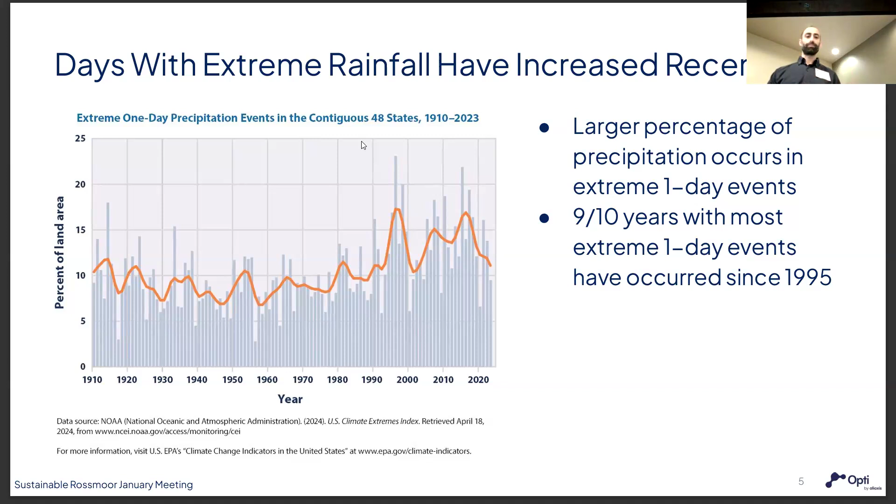There's also a long-term trend, a report card put up by the American Society of Civil Engineers that essentially states that stormwater infrastructure in our country is not keeping up with demand. I understand how that sounds, I work in stormwater, it might sound like I'm complaining, but I think there are some really interesting reasons for this, and it's worth understanding them because we're all trying to solve these problems.

First of all, there have not been dedicated funding sources set aside for stormwater management, which means that whenever somebody at a community or watershed scale wants to improve their stormwater management, they're competing with other projects and initiatives within that community, which can slow down and make the long-term investment strategy more opaque. There's also complicated governance.

We call them transboundary issues in the industry, but really that means watersheds do not care where your town lines are. There are two countries in the world that have gotten this right, I'll give you the answer: the Netherlands and New Zealand both have the same jurisdictions as they have watersheds. The name for mayor in Dutch translates the same as watermaster. So you can understand how they've been thinking about this problem differently for a long time.

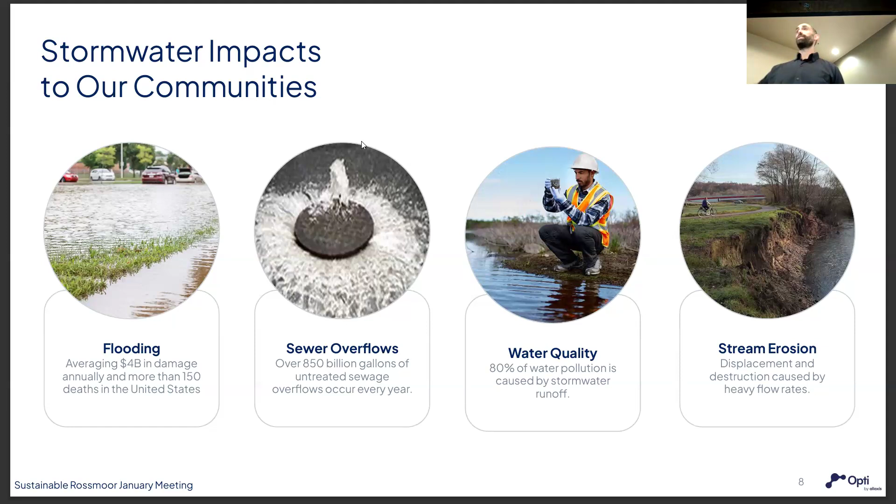That kind of issue not only affects the people who live around the places where the streams erode, but also downstream, where the sediments collect and reduce the ability to protect those communities from flooding. So there's a network of different effects that happen when stormwater is not managed.

So what is this traditional stormwater infrastructure that I seem so bent on improving? This is a very simple diagram, so apologies to the engineers in the room, but it's important to think about it in the abstract to get the point across. I think of them like bathtubs. They have a single size and a single size drain, and how fast that water leaves is a function of how high the water is inside, how big that drain is, and whether there's anything downstream already backing it up.

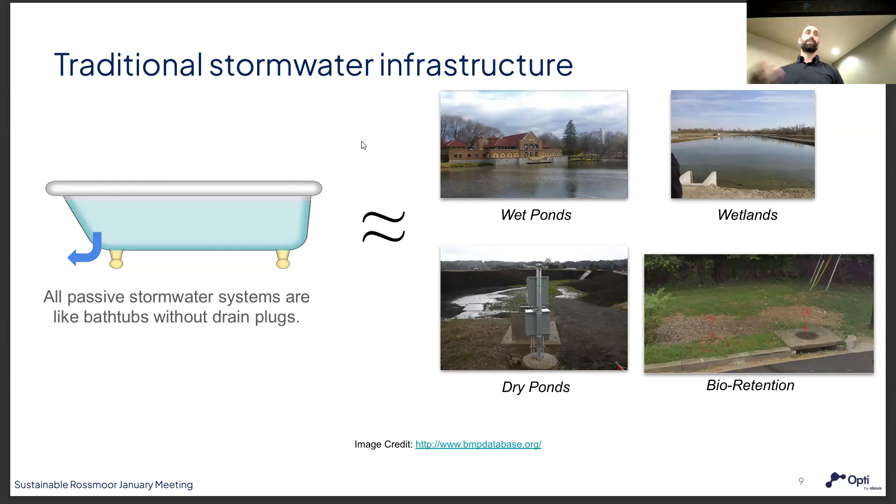They look like many different things. You can call them wet ponds or dry ponds, depending on whether they hold water during dry weather. They can be wetlands, they can be green infrastructure like bioretention basins. They can also be other things like cisterns or subsurface detention structures, like those put underneath parking lots or stadiums. All of these systems are designed to convey a certain amount of water for one of the objectives that matter to the community. And they're designed once.

What are they designed for? I've been kind of hinting at a few problems, but when stormwater engineers think about what they want to do with their parcel, they tend to have one of these goals in mind as far as how they're going to change how water moves through the landscape.

They know that if they slow water down, they can improve water quality by letting the particles settle to the bottom before they're discharged. They know that if they've got a big community that has combined sewer overflow or a flooding problem, maybe if they shift the timing of when all the peaks of water occur at the same place, they can get more effective capacity out of that system.

Obviously, if you have a lake in the middle of your golf course, you need it to look good so that people want to play golf there. Or if it's a wetland, it needs to be within a certain operating regime for whatever plants and animals live there.

Erosion is a lot like water quality protection. Essentially, the faster the water moves, the more soil it picks up. And the more soil it picks up, the more you're eroding. So you want to slow water down.

Flooding is the classic one. It's a very simple equation: get the water away from here as fast as possible.

And some places in the world, not so much in our country, but it's happening more and more—places like Jordan, for example, have led the way at designing for long-term water reuse. They want to actually collect the rainwater and use it for some purpose.

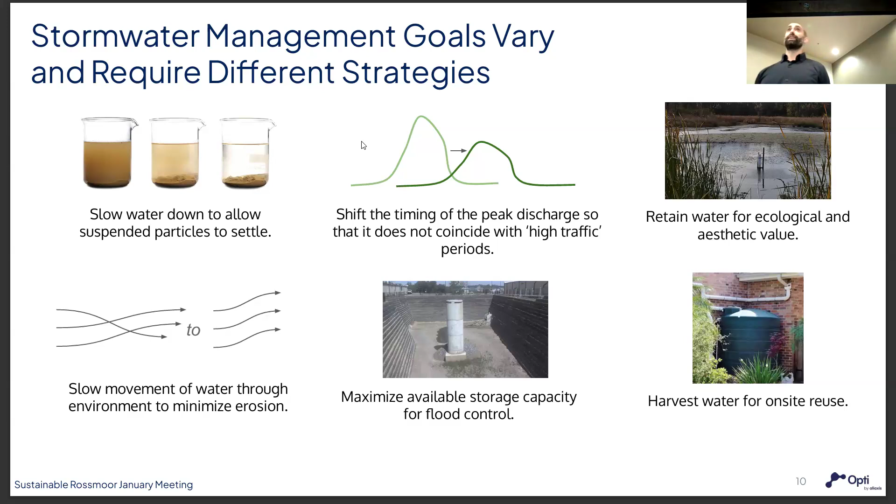One thing that's important to note here is that these are not necessarily compatible goals. If you can only design a bathtub with one size drain, you're only going to get an optimal outcome or solution for one of these objectives. If you need to get water away for flooding, you're not going to keep it slow for erosion control. It's just a difficult problem to solve.

There are site constraints. We've talked about how land is sometimes limited to be available for use. Sometimes there's an inability to infiltrate because of sediment in the soil, and other reasons why maybe the traditional approach doesn't necessarily fit.

One of the big pieces when we started this research that we heard from engineers in the space was that they didn't know how well their solutions actually did. These passive systems are not monitored on a storm-by-storm basis or even seasonally. And so that both means that communities don't know what their return on investment is for this infrastructure, unless they get calls from constituents saying the water's in my basement—then they know it wasn't working. But engineers don't have a way of getting that self-actualization of working on something they know works well.

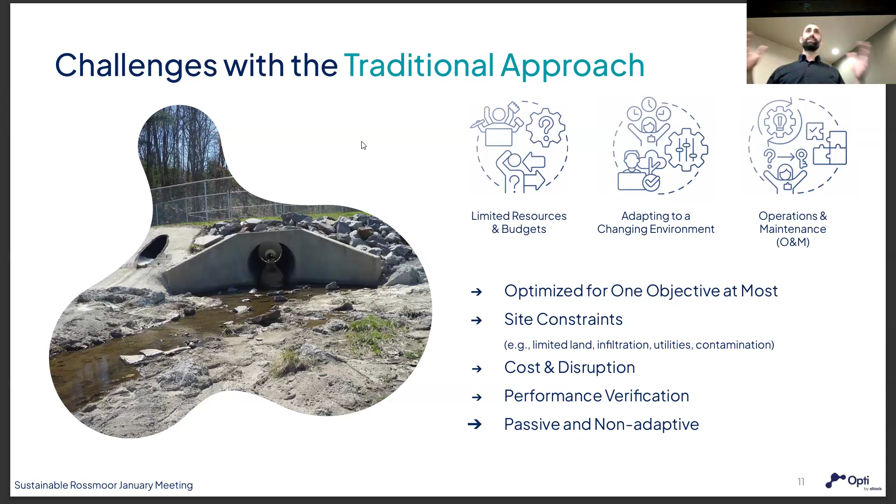So this is a problem that's almost expectable, not something that's that surprising. I'll also note that without the information coming out of these systems, you're probably going to either overspend on maintenance because you have to maintain them all the time to make sure they work, or underspend because you don't have the money and there's no reason to think it needs to be done. So that also affects the overall performance of the traditional approach.

So we looked at all of these things back in 2010, and we were inside one of the preeminent consulting firms in the country, Geosyntec Consultants, thinking about how we were going to build the next stormwater infrastructure for our clients. And it was frustrating. We realized the intuition that we had, that we've now tried to apply here, is that timing, flow rate, and predictability is the opportunity, is the way forward.

You can imagine traffic with rush hour. How many of you drive on the freeway when you know it's going to be rush hour? I certainly always avoid it, because if you can predict the flow of traffic, you can have a smoother commute.

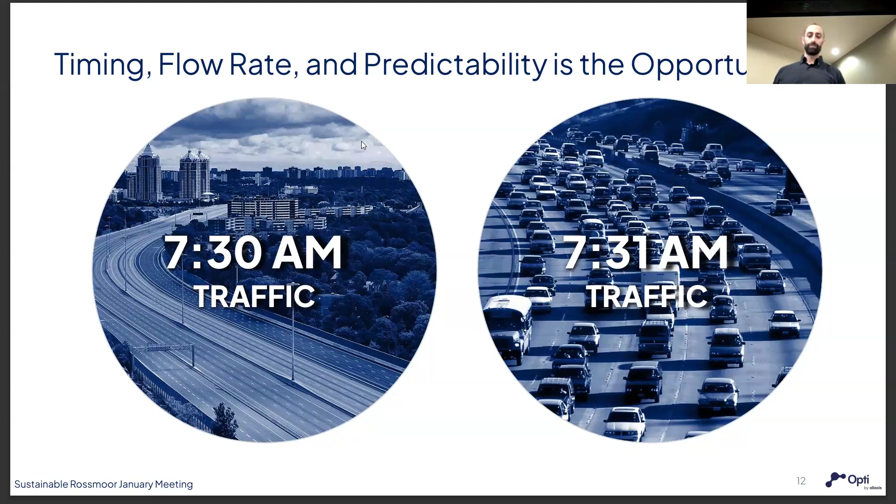What we came up with is a stack of technology that we called continuous monitoring and adaptive control, or CMAC. And what this does is it turns one of these passive structures into an actively controlled, or adaptively controlled, system.

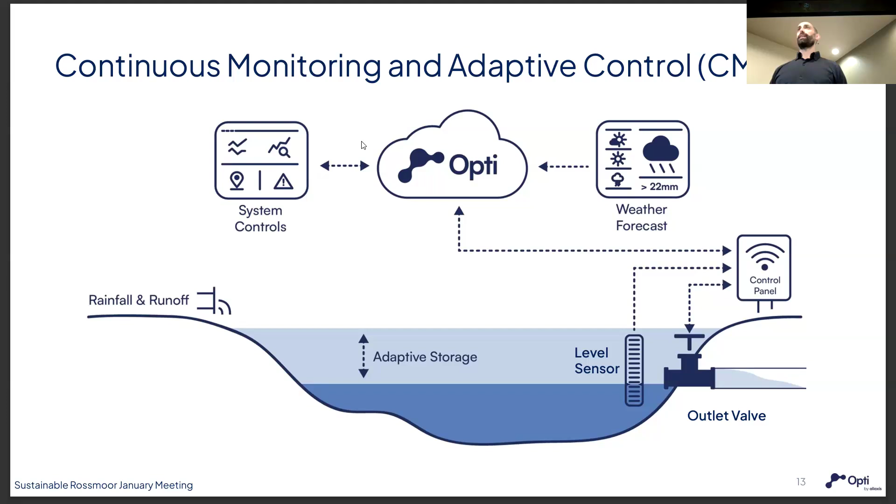So very briefly, we add a valve or pump which can control when water stays and when it leaves. We add a level sensor to the storage, which tells us how much water we've got there. And we connect that through a control panel to a cloud-running piece of software, which can take into account how other systems around the watershed are working, as well as the weather forecast, giving it the ability to understand what the weather will be in the future, both whether it will rain and whether it's going to be dry, and provides visibility into how all of this is playing out to engineers, consultants, and other community stakeholders so that they can understand what's happening and how well their system is performing.

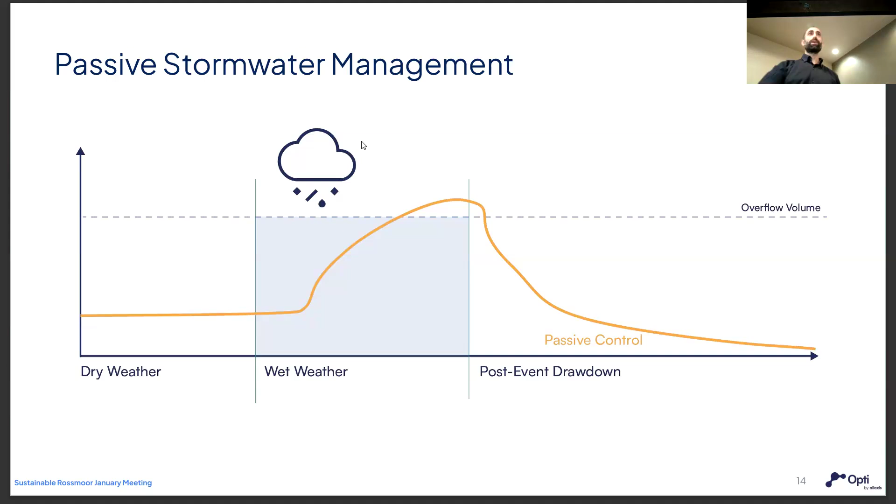With that combination, we're able to turn this passive strategy -- and if you think of this graph as showing how much water is in one of these ponds or cisterns or detention basins over time as it goes through a stormwater or rainfall event, you can imagine that in dry weather there's a certain amount of water, and when it starts raining, it starts collecting runoff, and it starts releasing that runoff while it's collecting it. Once it gets to dry weather again, you're going to continue to see the water drain out at whatever rate, whatever natural curve you would have based on the height of that water and the size of the orifice.

With CMAC, what we're able to do is change this. We can see a storm coming. If we know the storm is going to be bigger than the amount of volume you have to put water in there, we can reduce that volume predictively, letting it out ahead of time. During wet weather, we can either completely hold water back or let it out at a lower rate so that we don't actually go over the top of the system. And then after it stops raining, in the post-event period, we're able to say we know it's going to be dry, so we know it's safe to hold this water back.

In that process, we can allow natural occurrences to occur -- settling, nutrient uptake from vegetation -- which then, when we eventually get to the post-event drawdown period, which happens at a managed and predictable rate, we're actually discharging something cleaner. That's essentially the intuition, and the way -- there are more complicated examples of it, but that's the basis of what we're applying here.

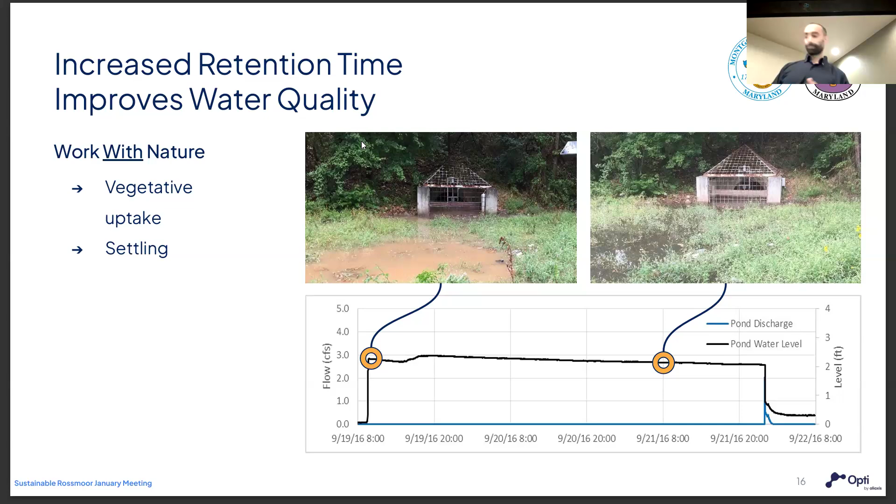Your system is holding the water back. Exactly. So we control the valve, and we just tell the valve when to open and when to close, based on all these sensor information and the weather forecast, essentially. And what you can get with that is you can actually get multiple benefits out of the same piece of infrastructure, because you can have different strategies for different sized events.

So with one system, instead of optimizing it for one, we can create storage just in time to protect for flooding. We can affect the timing of when different parts of the community drain so that there is no downstream choke point that causes that combined sewer overflow. We can increase residence time, as I mentioned, in order to improve water quality.

By the way, that's not an idea that we came up with. If you've ever been to a wastewater treatment plant, the first thing they do is they hold water in these big tanks and they keep it as still as possible. It's called primary treatment. So we're just doing it in the upstream area.

Same exact idea. We can tell the community that's responsible for these assets whether they're working the way they used to. So if they need to do operations and maintenance to clean it out or what have you, that's possible. And we can choose, instead of releasing it at the end of the storm, we can just keep it held forever, so that if you want to irrigate your crops or your garden or your golf course, you can do that.

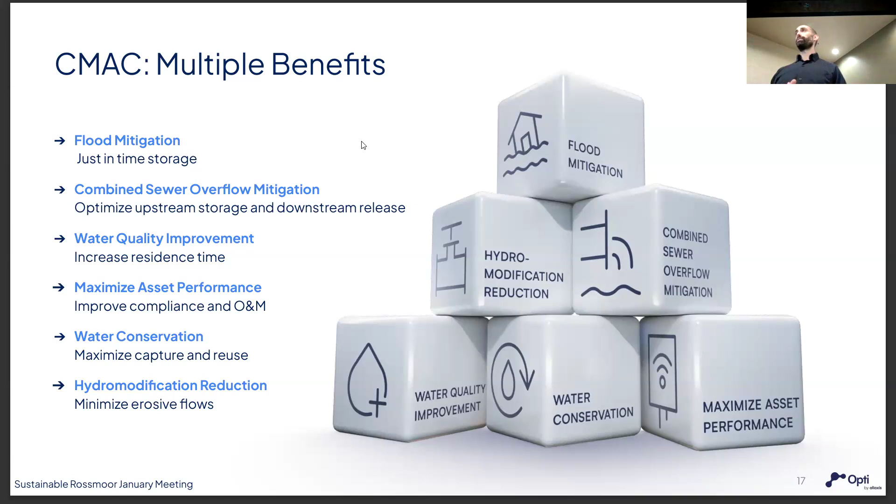And by the way, if you're controlling the timing of flows and you're able to control how fast water leaves, you can choose to make it as slow as possible every time, which ultimately serves the purpose of minimizing erosion.

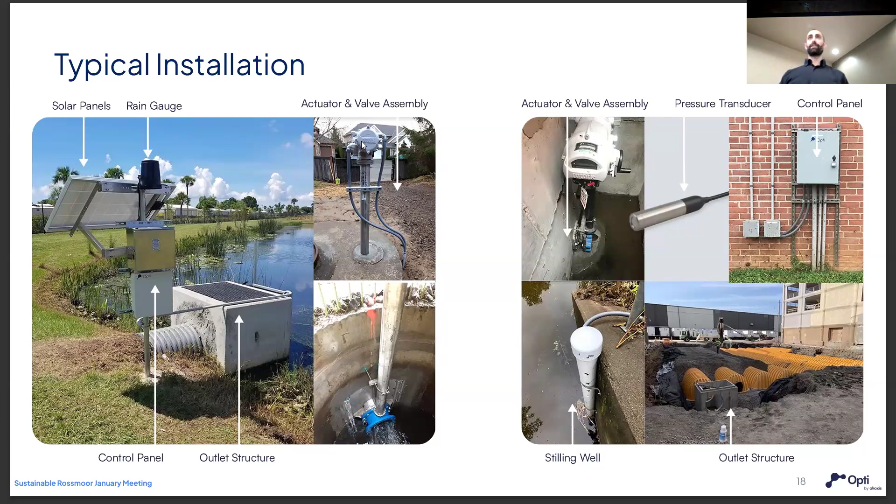Getting this right is important because we're trying to solve some important problems for communities. Ideas are cheap, but execution is hard. It's something I think we all probably know. And that's essentially why this has to be a company. I was very interested in the research in this a long time ago, but the opportunity to do it means you need to work with professional engineers and you need to have reasons why communities believe that it's going to work and that it will be supported long term. And so that's essentially why OptiRTC exists.

And some of the pieces that go along with that, I won't read all of these. I think alarms are important because they can alert people to conditions that matter in this infrastructure, rather than having a completely automated solution that nobody ever sees.

We can know if something's going south, so the O&M teams can get alerted to be available to help. On the mechanical side, a really important detail for safety is that we work with local civil engineers who are designing these infrastructures to know what a safe fail-safe position should be. A fail-safe position is typically either open or closed, depending on the type of infrastructure and its location in the watershed. But if something goes wrong with the mechanical stuff and computers we've added, we want it to be predictable. That's the most important thing, and it needs to be consistent with the expectations of whatever engineer signed off on it.

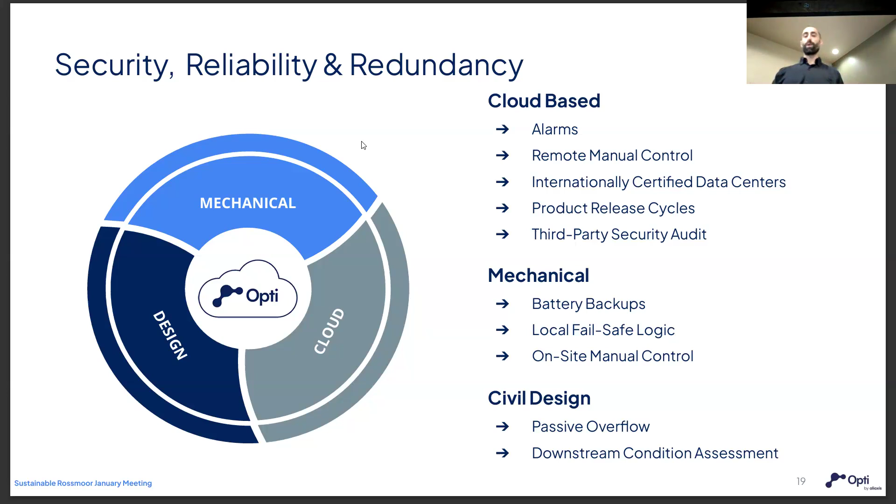We also assist local community partners with downstream condition assessment, so when they're designing and installing these systems, they're doing so with awareness of how it's going to work in the end, and it can be professionally responsible. That's an important part of our formula for community resilience: combining local expertise with technology deployed across many types of stormwater systems to improve how resilient communities are to extreme events.

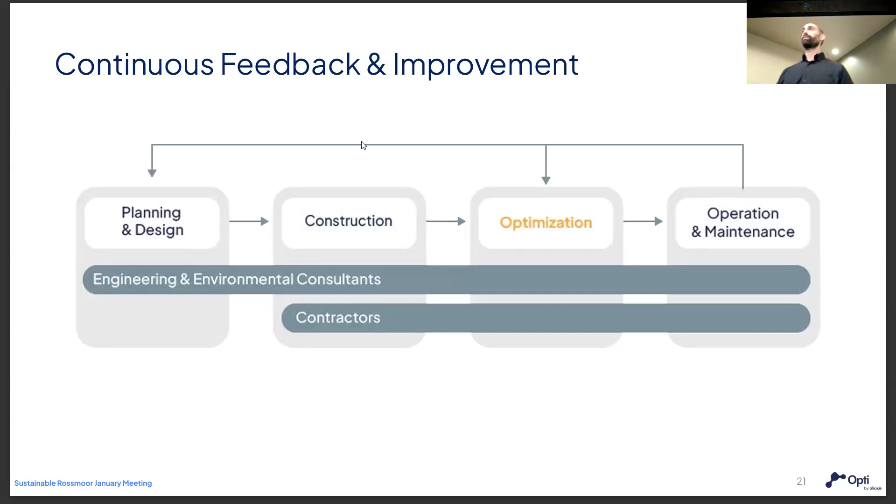Sometimes things don't work the way engineers planned—actually, a lot of times things don't work that way. It's important for community investment to be properly calibrated to the biggest problems they face. This visibility from improving how each individual parcel works can inform long-term planning efforts so watersheds can be made more effective over time, without wasting time as we get better at the solution.

I'm not going to belabor this, but our customers win a lot of awards for this, because they're taking a step forward toward designing for an uncertain future, not just solving the problems of the day. And because they have information that proves it, which always helps with people looking to provide recommendations.

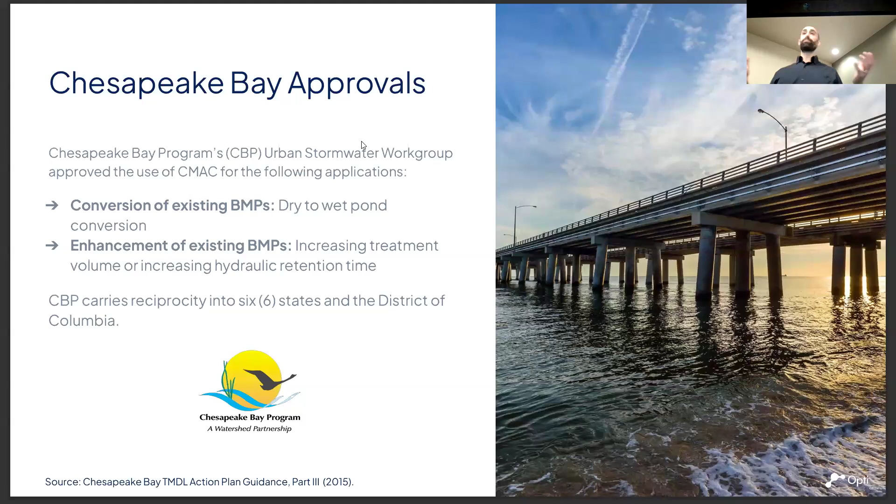I'll go briefly through this piece too, because I want to get to the case studies. In the stormwater design space, regulatory approval is an important component of being considered an adoptable solution. We've worked hard with a number of leading communities in stormwater management to establish ourselves as a trustworthy and viable solution. In Chesapeake Bay, we've been approved for dry to wet pond conversions, as well as increasing volume for flood protection and retention time for water quality.

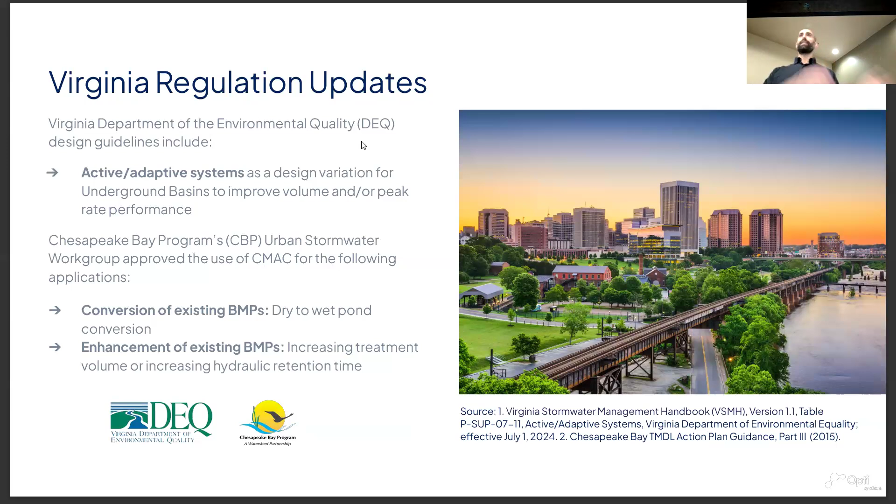In Washington State, where erosion is a major concern and it rains almost all the time, we've been working with them for a number of years, and Lainey will give you a deeper dive on that in a moment, to help optimize how fisheries they really care about are protected from increasing urbanization. In Maryland, I mentioned earlier, it's about water quality permitting and approaches. And Virginia has also sanctioned our solution as suitable for taking facilities that once were only static and handling dry weather, and now can be used to hold water back for various alternative objectives. Thank you for your attention.

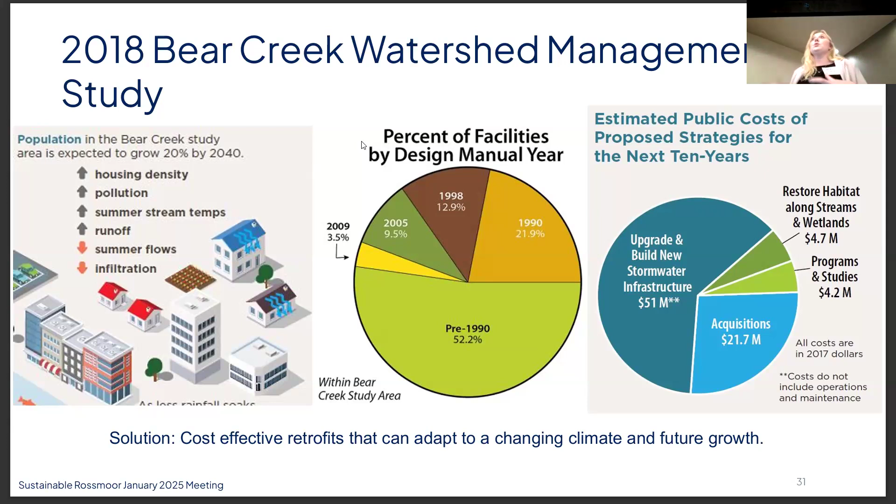What they looked at here was just traditional detention ponds and stormwater ponds that are passive, and that's what costs this much money. So King County and Redmond were both really looking at how they could retrofit some of their existing systems, or do something else besides build a bunch of new stuff for $50 million, to also get the same benefits.

So they looked at a bunch of different things they could possibly do. One thing they looked into was building new infrastructure—new ponds. The problem is that takes up space and land, and land is not only hard to come by, especially in an area like this—it's quite built out, lots of homes, a very residential area. There's not a lot of space, and the land costs a lot of money.

It's expensive—probably the most expensive thing in that $50 million this community was looking at purchasing for these new projects. So they were thinking maybe let's not do that.

They looked into LID, or low impact development—you can also hear GSI. These are more about slowing and infiltrating water into the ground. The problem here in this area particularly is that the soils just don't want to let water through—they're just not having it.

A lot of areas in California are like this too—they have really thick clay soils that just don't want water to go through. So they looked into whether they could do deep well infiltration—could they dig through all that clay and try to get it somewhere else? The answer again was no; there's kind of no glacial outwash happening.

There wasn't really a deep groundwater basin that you could infiltrate to, like there is in other places like the Central Valley or areas where you can really store more water underground. So that was also a no.

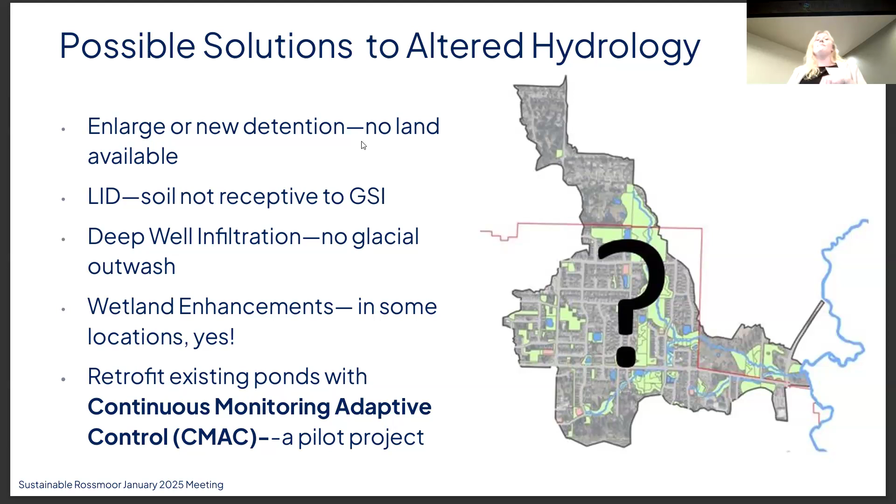They are also looking at some wetland enhancements, which are really good for water quality treatment and slowing down the water. They have some of those, and in some locations those are awesome, but that's not going to solve all of their problems. So the other thing they were looking into is how can we retrofit existing ponds with CMAC. That's what we worked on with them, and we did a pilot project that we're hoping to keep expanding.

So why did they end up choosing CMAC? Why did they decide to work on this project with us? Like I mentioned, it limits the land disturbance significantly. In the figure, the blue pond areas are their existing ponds, and the red over it shows how much they would have to build and how much space they would have to take in order to get the benefits they need. You can see some of that is going into nearby houses and over roads.

There's just not enough space for what they would need to do with traditional passive infrastructure. Another reason was that traditional passive infrastructure is about $1 million per pond - that's no small amount of money. But with CMAC implementing the hardware and software we provide in this system, it's more along the lines of $165,000 for the capital costs. So just avoiding spending those millions for each pond can be really helpful to get the same benefits.

Another thing they were super interested in, which is really working out well, is collecting the data and being able to use that data to make decisions on the system. So they have a lot of things they're looking into in this area.

They're really concerned about the salmon, the trout, and the biology going on in the river, which has to do with temperatures, the amount of water, the quality of water, and all those things. They're doing studies right now to figure out how the systems we're putting in place are working, because a lot of these things that engineers design and build, we're not quite sure if they're working like we wanted them to.

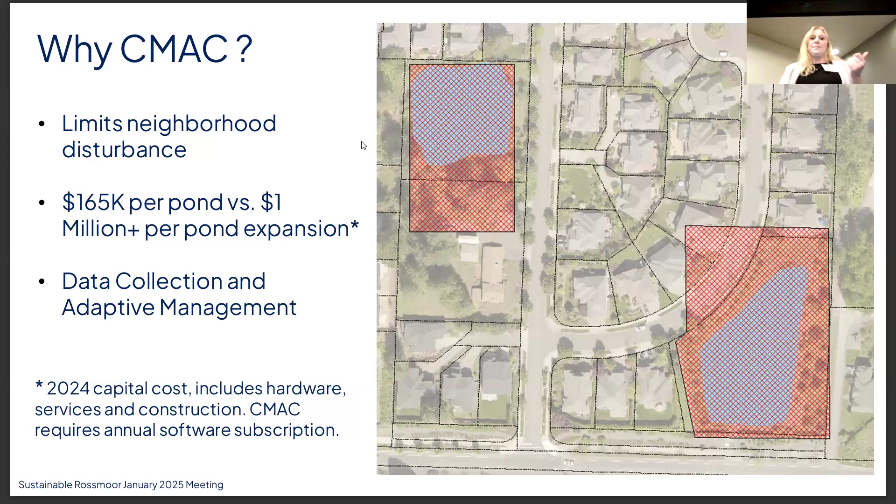Speaking as a civil engineer who tried to design these systems for a long time, I was never really sure that what was put in was exactly what we wanted it to do. In this case, they're able to see the data and use it in other studies to say, hey, we're not really seeing the water quality benefits we wanted - what else can we do to help? So that's why they decided to go with us.

I'll show you how it worked. The partnership was really important here between the city of Redmond and the county, because they both own land within the watershed to the tributaries that go to the river of concern. We worked together with them to do some feasibility studies on how the CMAC could work and what benefits it could give them.

Like I said, they want to monitor these things for other reasons. They're doing a study right now to see the trends in the overall watershed, and this is going to be a really important study to show how these systems can work and help inform what they're going to do in the rest of the watershed.

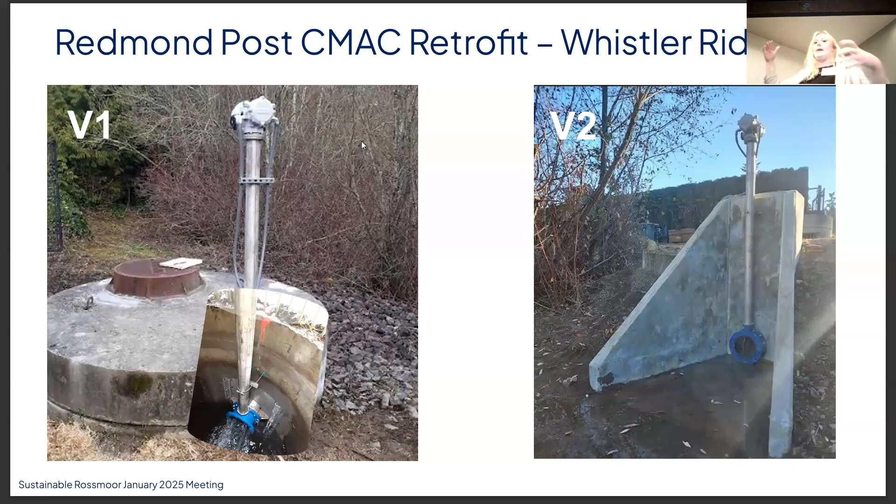So I'll show you some pictures of what they look like. This is one of them - you can see the blue valve at the bottom, and it goes up the stem to the actuator, and that's how it opens and closes. That's just at the outlet point where that wing wall is. Here they tried to put it both in a manhole and outside, and that one ended up working better in that case. This one is called Crown Heights.

It's kind of in a more open suburban area. They had a bit of space. They have a solar panel, and they let that area behind in the picture fill up with water when it's raining. This is a rare sunny day we caught in Seattle.

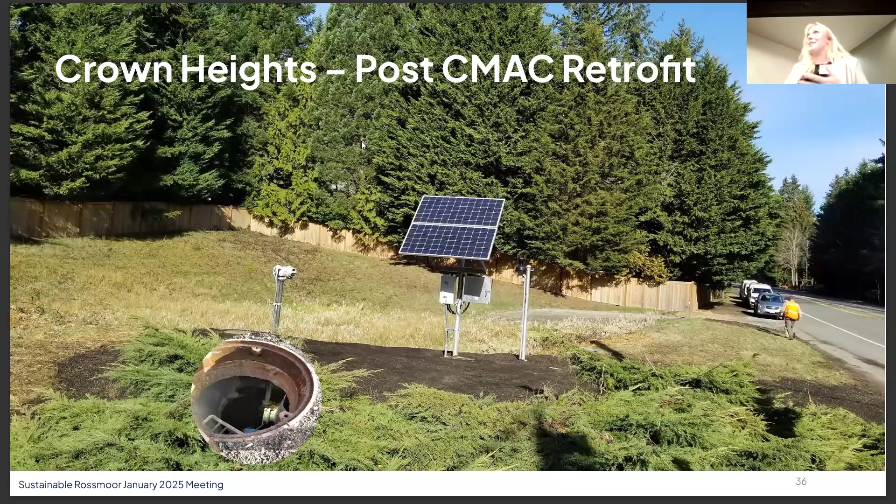This is another example of one of the ponds, which is right nearby, but it's within a more densely urban area, so there's housing right next to it. Those are houses that we maybe would have had to knock down for a new pond, but we didn't have to because of CMAC.

So how is this working? We built it a couple years ago, and it's been working for a while now, so we've looked at the results to see how it's going. These figures show the King County ponds, the ones on top that were previously dry ponds, so they don't usually keep water when it's not raining. The ones below are in Redmond, which are usually wet ponds that keep a little bit of a dead pool, if you've heard that term for reservoirs.

This is about 60 events that were measured, showing peak flows on the y-axis. The blue shows the passive peak flow, which is modeled for what would have gone through without the retrofit. The orange to the right is the measured peak flow actually in the system. You can tell it's much lower, which is good—we want lower peak flows to help with erosion, flooding, and related issues. Especially on the dry ponds, we saw a huge decrease because usually they wouldn't have extra space to fill up before a storm, and now we're able to do that.

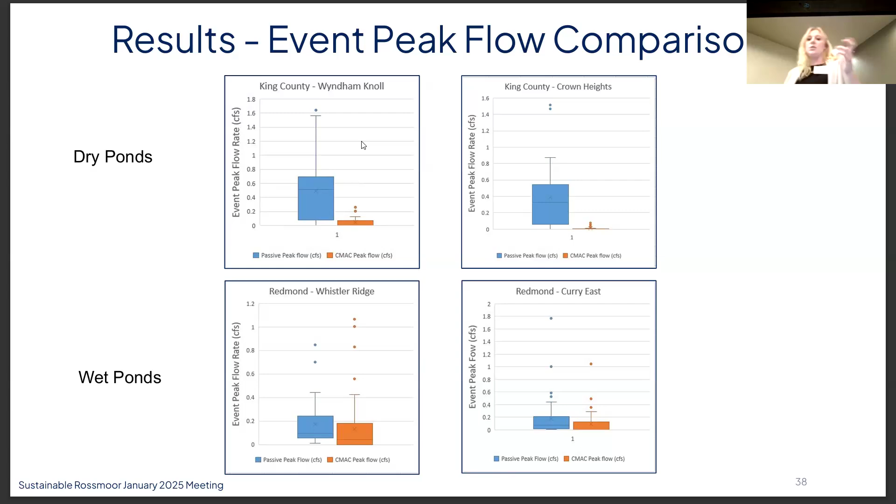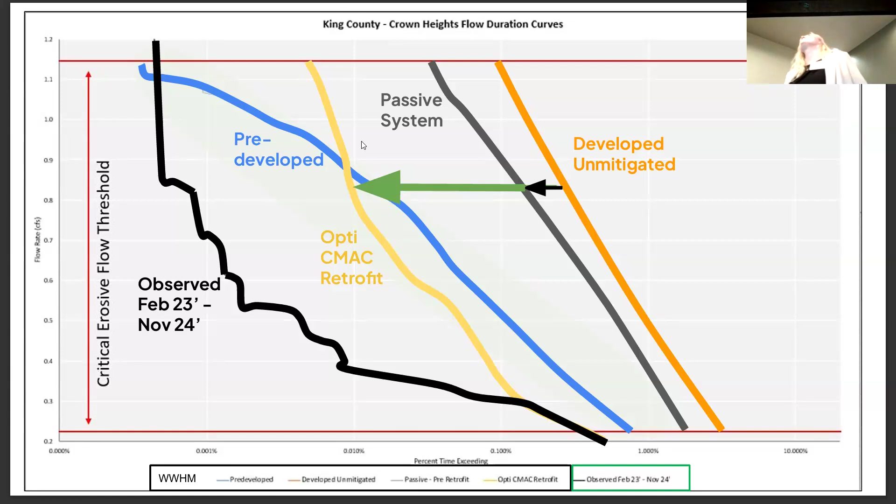So do we know that it's going to have less flow under those conditions? That's not always the case. Every customer, every client is looking at something different and has different requirements. If you have a certain amount of flow that you know is important for the salmon, you want that base flow to exist, so you can set the amount the valve is open to that flow, and that flow will consistently run through the creek. In a situation where we don't have the ability to control that, there might be more dry periods, more flow at times, or erosion happening. But when you're able to control it, you can make sure you have exactly what the ecology of the creek needs, and then control the rest.

I guess I was asking a sort of meta level question: is Mother Nature always right? I wish I knew. I don't question my own mother, so.

Now, I disagree with that, you can tell her. The period February '23 to November '24—was that below average, average, or above average rainfall? I think it was pretty average. And like I said, it's not representative of a whole 40-year record. In 40 years, you'll have much larger events that will cause things to vary a little bit. So taking it with a grain of salt, but it's really good news that what we're seeing in the actual observed data looks to be trending in the right direction.

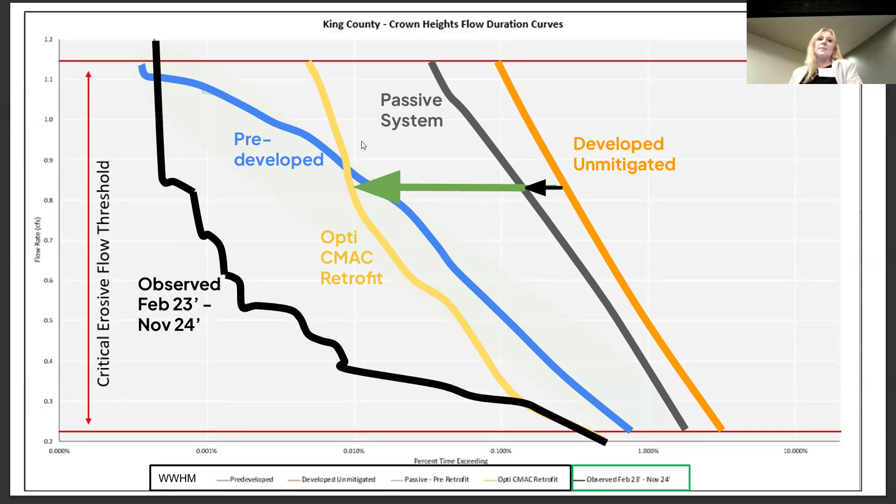Where does recycling water fit in? I love that question. Alex said maybe people aren't recycling water—I disagree. Here in California, that's becoming really important. California, Arizona, Nevada, these areas aren't as concerned with stormwater and water quality; what's on everyone's mind is there's not enough water for people to drink. We have so many people in places that never really had much water to begin with, and what are we going to do about that? One interesting thing—we have a couple projects in California, one in LA, where we're capturing and reusing stormwater for infiltration back into the groundwater, as well as reusing it for irrigation. It's a park, basically. So reuse is really important.

It's always a good idea to have more sources of water supply than less, so you can have more resilience. If you can add even a little bit more to your water supply by reusing stormwater that otherwise would have gone downstream somewhere else, that can be really beneficial to communities.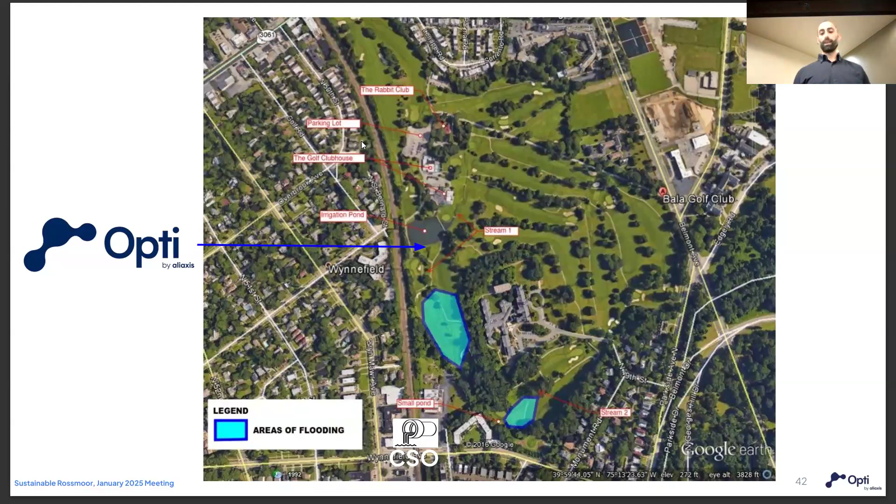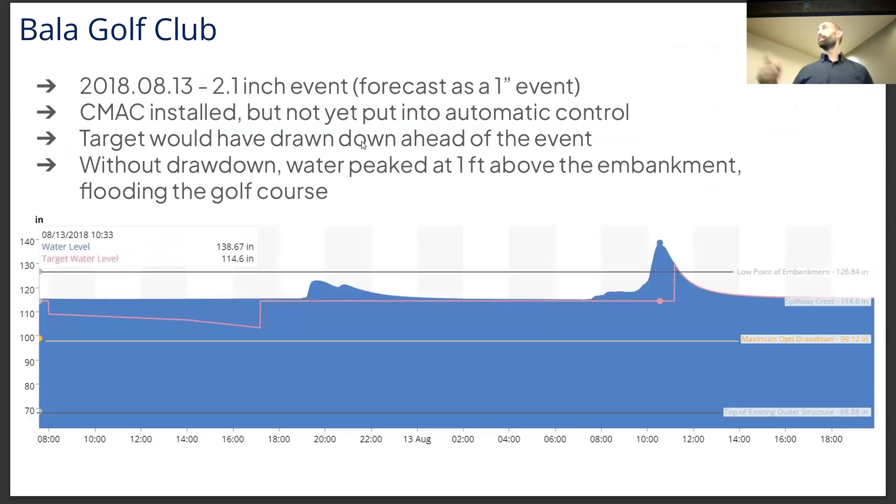This is a golf course that has both a flooding and a water quality, as well as a combined sewer concern, in Philadelphia, near Philadelphia. I'll skip this slide. The basic picture here is that it's a much more cost-effective approach to manage that big pond at the golf course than it is to build more of them. There's some interesting data here for a 2.1-inch event that occurred right before they started turning on our system to manage the flows. They actually saw an overflow—this is a chart from one of our web dashboards. You can see what that looks like when it's happening. Nobody was playing golf that day, or for a little while, which is not a great thing.

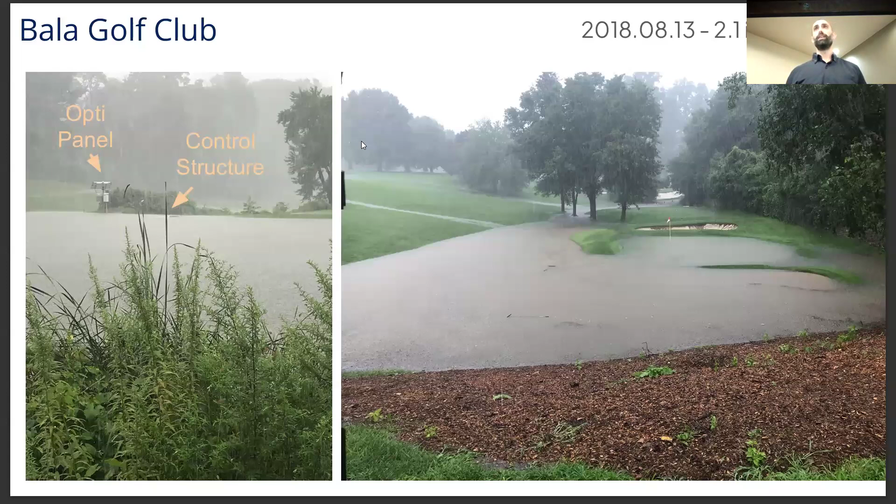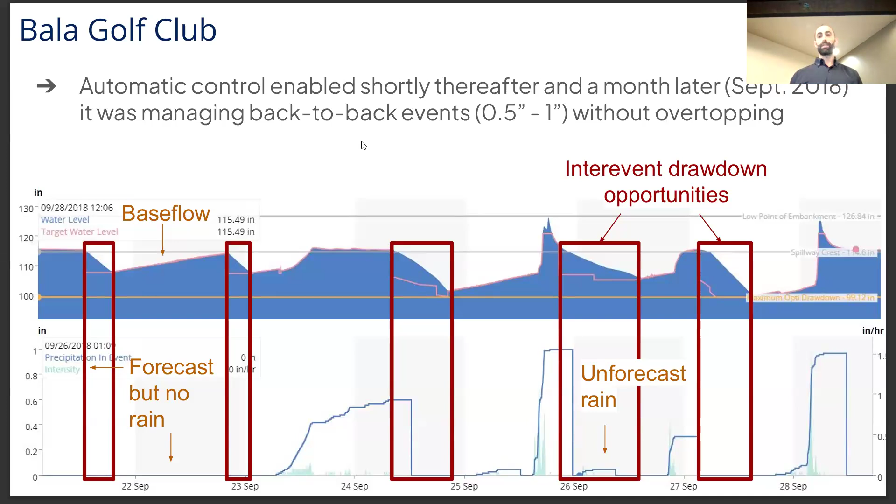But since that time, after turning it on, what's highlighted here is that the system continuously looks at what's happening and predictively draws down the pond that otherwise is used for being a nice pond at a golf course and recreational purposes. So they're able to take that benefit and make it work. That's continued—5 years later, we've had a lot of success at managing multiple flows.

Albany, New York is another community that's really dense and has been a big adopter of the CMAC approach. What they've done that's particularly interesting is they've really understood the opportunities upstream. So the questions about where this fits into what we're doing in Tice Valley or around Walnut Creek—you can think about this as an opportunity to operate at the most upstream intervention point that you can, in order to affect what's downstream.

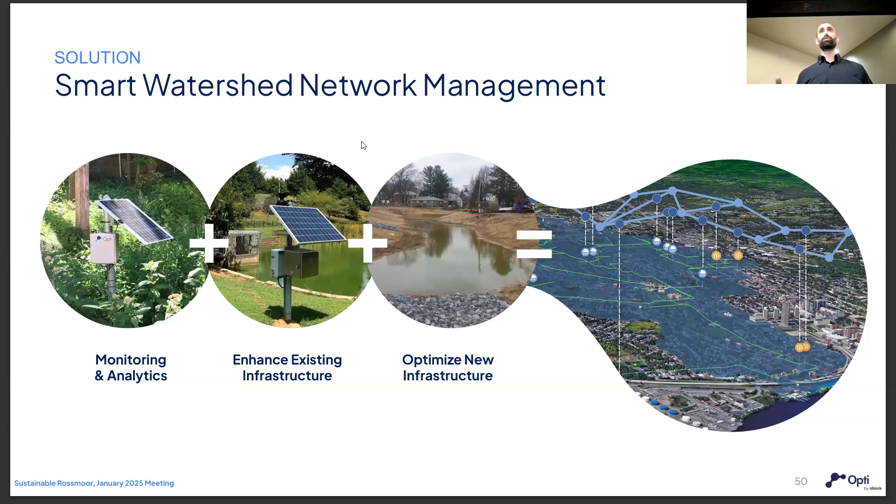This strategy is what Albany has been able to deploy to manage what was previously a combined sewer system that, when they got their consent decree from the EPA, I believe was 543 million gallons of raw sewage being discharged into the Hudson River every year that they needed to protect against. So they've made significant progress by installing CMAC solutions in the upper reaches. I believe this is at the Beaver Creek subwatershed here.